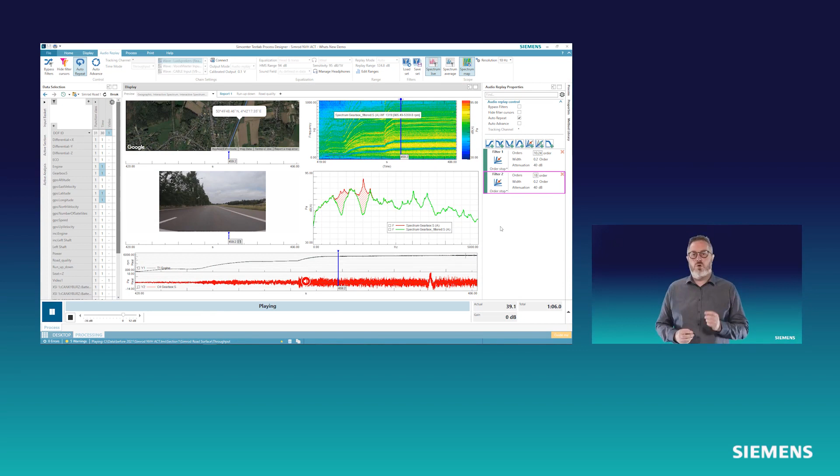My name is Ian McGann, and together with my colleague Simona Ottaiano, we will walk you through the new updates and features we have developed for you in Simcenter Testlab 2021.2. Before we dive into all the news and innovations, I'd like to share with you why we are so motivated and driven to keep developing and advancing Simcenter Testlab.

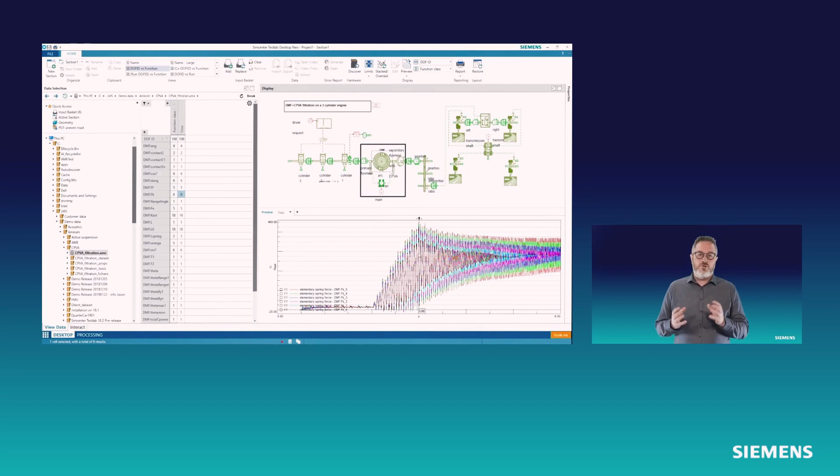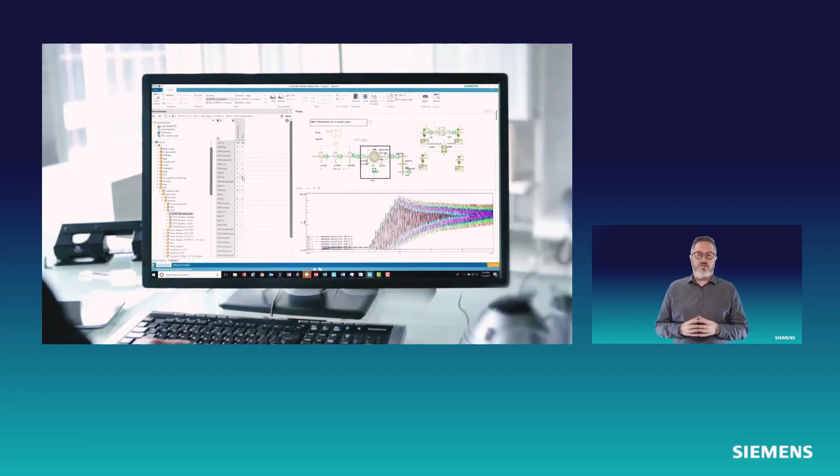This release is a result of hard work of many talented engineers located in multiple countries, united by a passion for making physical testing more efficient and innovative. Due to the current challenges faced across all industries, such as growing product complexity, increased product variants, and customer expectation, the development teams are under pressure to bring products to the market in record time and with cost savings. Very often, they need to work with disconnected tools and processes, including inconsistent processing methods between test and simulation.

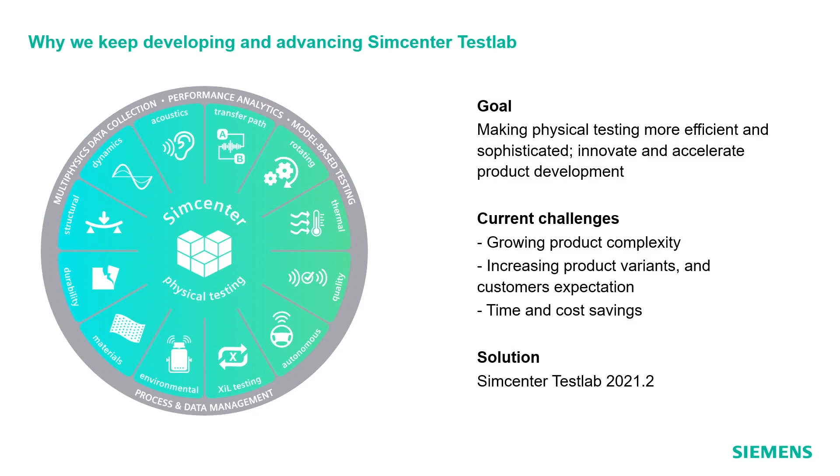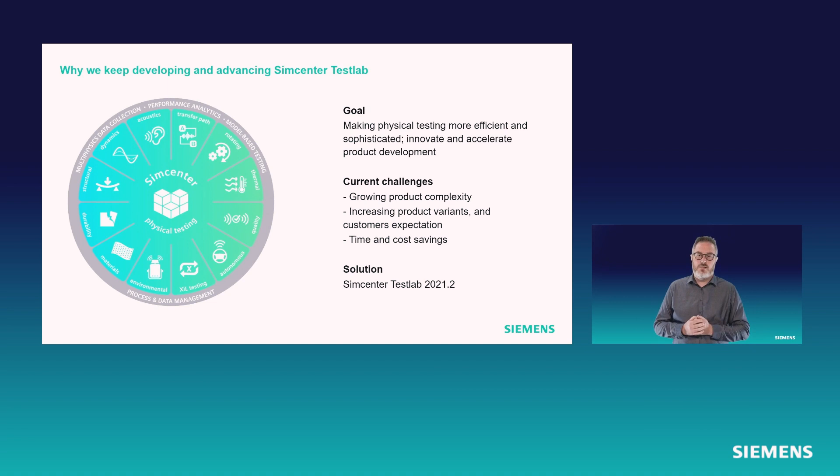Our goal is to empower test and validation teams with the tool set that will help them to overcome these challenges and achieve higher testing efficiency, resulting in time and cost savings. We are on a mission to innovate and accelerate product development by creating a working environment that merges test and simulation together in order to take control of the product attributes much earlier in the development cycle. And the latest Simcenter Testlab 2021.2 release validates this strategy.

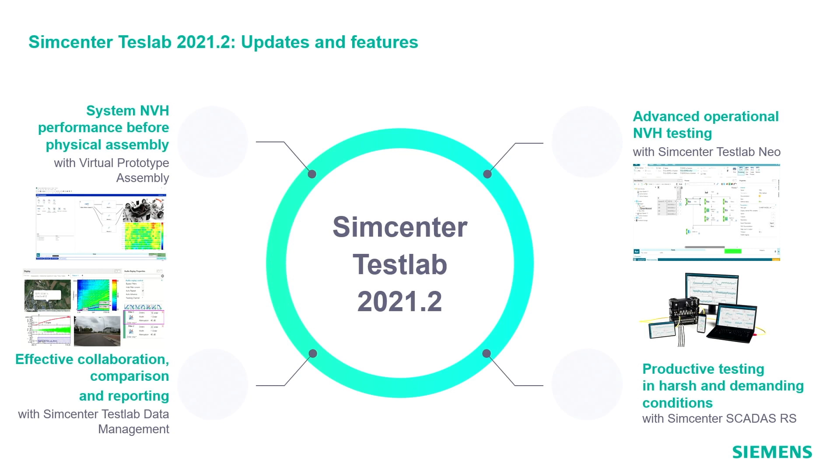In this release, you will experience significant advancements in 4 areas: vehicle NVH prediction with virtual prototype assembly, advanced operational NVH testing, simplified and more effective collaboration, comparison, and reporting, and productive testing in harsh and demanding environments. And now, I'd like to give the word to Simona, who is our expert in virtual prototype assembly. Simona, what is this technology all about?

Thank you, Ian. Hello, I'm Simona Ottaiano and I'm part of the business development team for the automotive industry. And it's my honor to present you the main highlight of the release, Vehicle NVH Prediction with Simcenter Testlab Virtual Prototype Assembly. We acknowledge the current challenges that automotive OEMs are facing. They must handle the increased system complexity, multiplied by an extensive number of product variants. Think of numerous vehicle configurations customers can form. They can select between different bodies, tires, and drives ranging from traditional combustion engine to full electric motor.

And this is another point. Automotive OEMs are expanding their portfolio towards electrified drivelines, which requires new NVH approaches and engineering strategies. And of course, the development teams are under time and budget saving pressures. For this reason, building a prototype of each vehicle variant is not an option anymore. And this is where virtual prototype assembly comes into play. This technology marks another achievement in merging test and simulation, as it combines test and simulation component models.

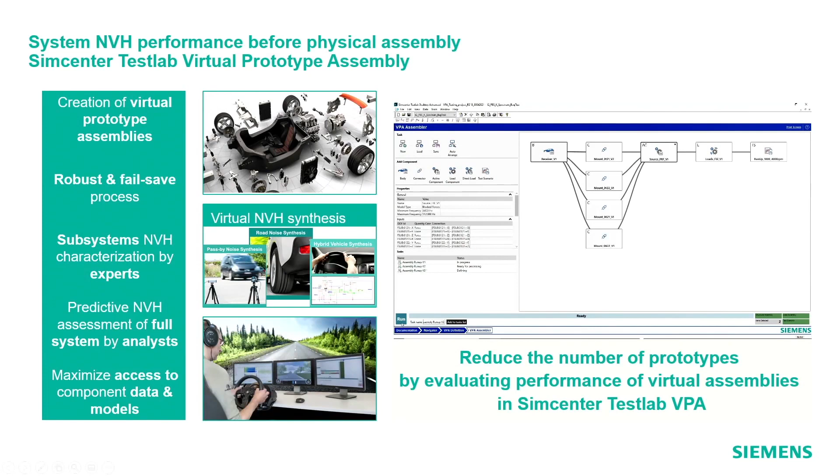It allows engineers to create and assemble vehicles in a virtual environment from separate component models and assess the NVH performance of all those components working together. The component models can come from test data or simulation data. Essentially, it's about front-loading vehicle-level component NVH testing into the development process in order to make changes as early as possible.

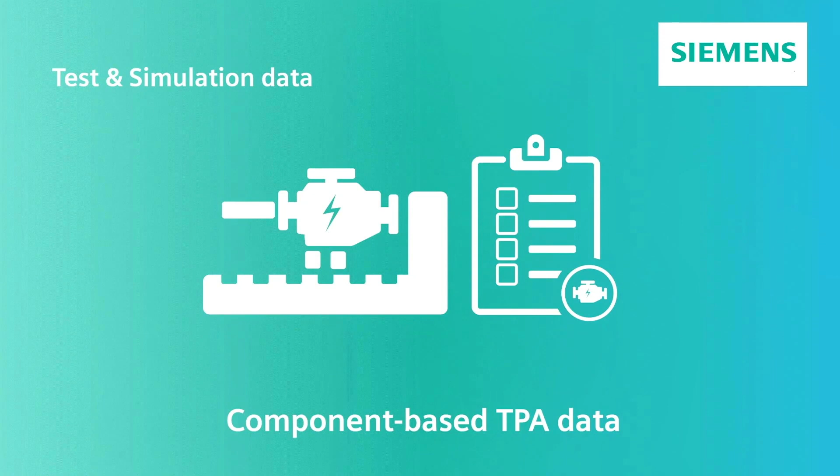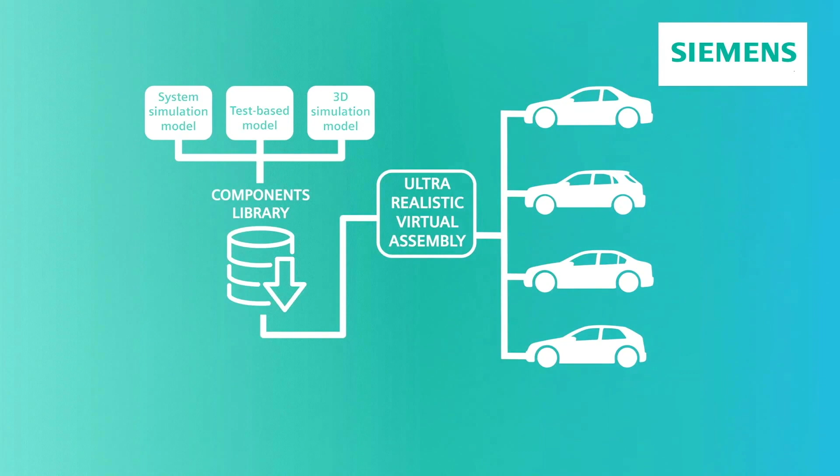The key to this is component-based transfer path analysis, where engineers test each component to characterize the noise and vibration source. With this source component description, you can build up a library and use it in a modular way with other vehicle components. In this way, you can virtually assemble the entire vehicle and predict NVH performance. This approach empowers the team to take control of the NVH in much earlier development stages.

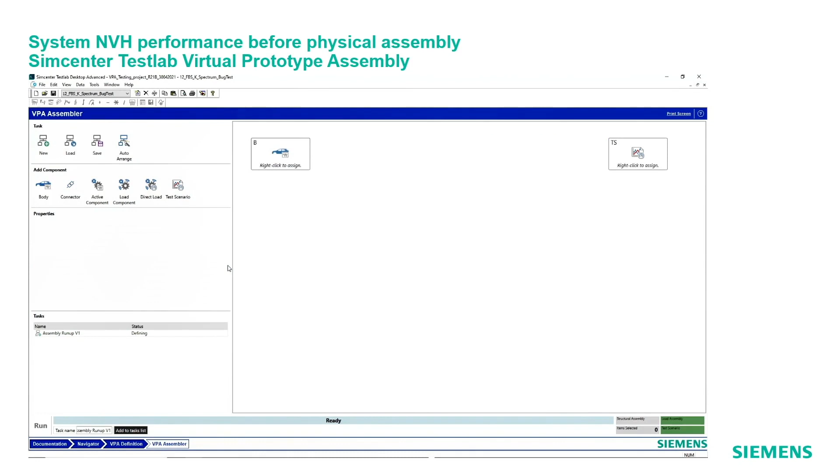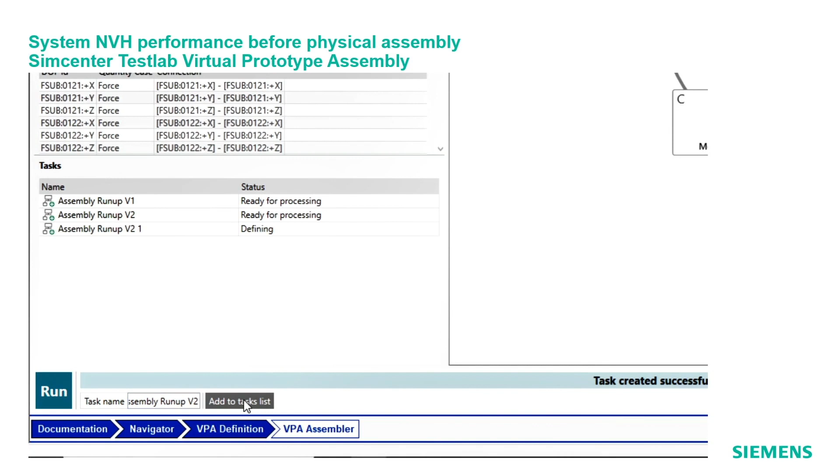The virtual prototype assembly in Simcenter Testlab 2021.2 makes this technology accessible and easy to use for anybody in your team, with robust and fail-safe embedded processes. We hope that you will appreciate the intuitive user interface to build a vehicle assembly and the flexibility to easily exchange the components to evaluate them quickly. Also, this technology accelerates vehicle development by enabling different teams across the world to cooperate and work unitedly on joint projects. Moreover, with this solution, you can build a solid OEM supplier cooperation framework based on objective data and requirements.

The next significant portion of improvements you will find is in Simcenter Testlab Neo software. As you may know, Simcenter Testlab Neo enables you to easily evaluate, analyze, report, and share test and simulation results. With Simcenter Testlab, you can maximize your efficiency and achieve engineering insights even when handling large volumes of data. The increasing number of design variants puts pressure on NVH and sound quality engineers in development and validation teams. They must deliver test results faster and in a more efficient way.

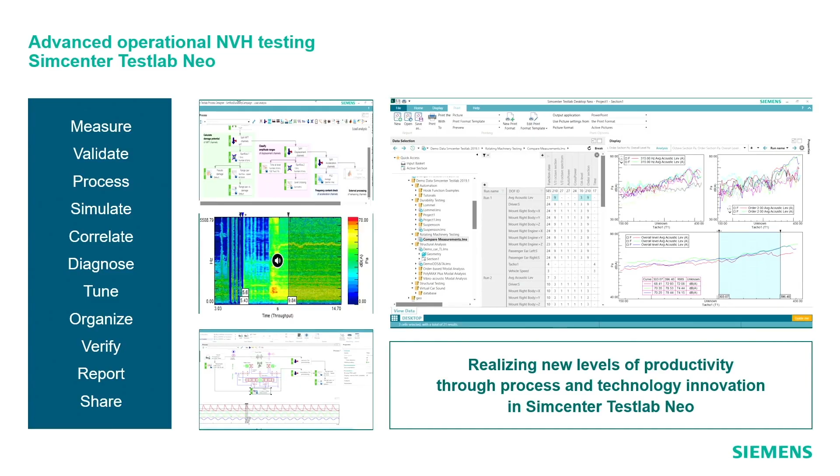Regardless of their level of expertise, engineers need tools that help them achieve better results more quickly while maintaining the same level of quality and confidence in their analysis and methods. Simcenter Testlab includes new advanced audio replay and sound quality analysis extensions. To simplify and accelerate your testing projects, Simcenter Testlab Neo 2021.2 Process Designer provides new filtering and selection options based on vehicle operating conditions. You can filter and select only the data or segments recorded under specific operating conditions.

And that's not all. Now you can even set up selection automation based on the defined operating conditions. And as the next step, you can use it in a processing sequence in Simcenter Testlab Process Designer. Imagine a situation. You, as an NVH engineer, record some data for your project, and you need just specific segments. For example, when your product was operating under a particular condition, such as a specific speed, RPM, and so on. Simcenter Testlab Neo Process Designer supports automated validation of test conditions, as well as free drive scenarios for controlled testing.

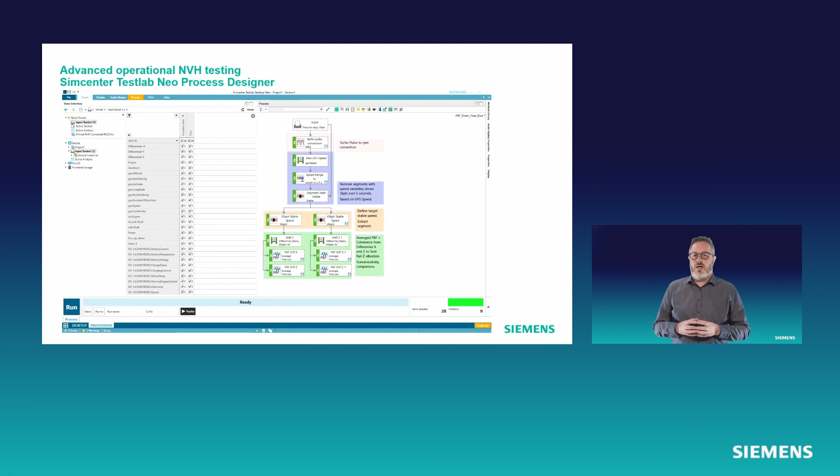As a second step, you can validate the data in a quick and iterative way, tracking selected parameters. The software then evaluates the effect of order pass and stop filters on any replayable signal. And you can quantify the psychoacoustic relevance using, for example, the new hearing model tonality maps.

Once you validate and assess the recorded data, Simcenter Testlab Process Designer provides you with automated conditional processing using smart segment selection to break up long measurements based on annotation channels or measured values. Then you can separate identified segments.

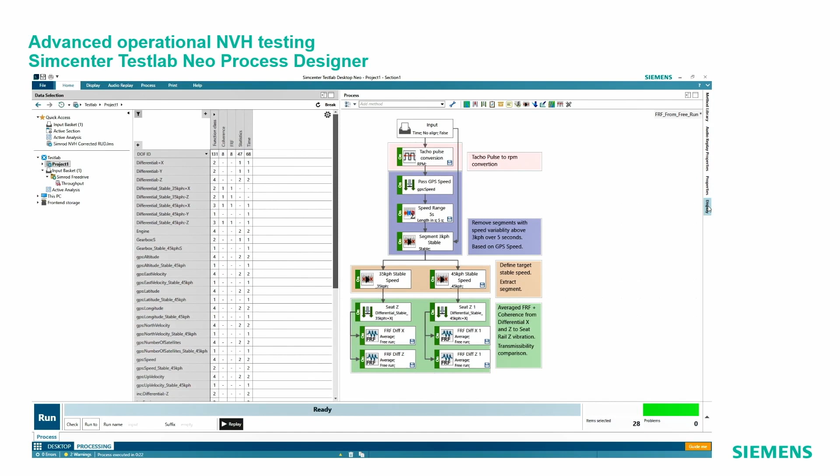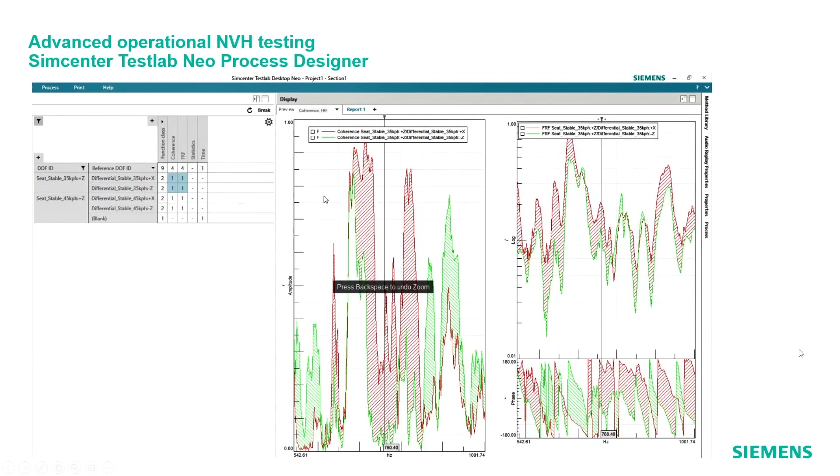The checks method validates the adherence to the requested target operating condition. For example, the smart segment selection will thus limit the calculation of coherence and frequency response functions to data segments with sufficient stable speed conditions.

Another feature I'd like to mention is a simplified buildup of your models. With this release, you can assemble the test geometry, importing and merging existing Testlab geometries, finite element files, or STL files. You can manage multiple geometries in one project.

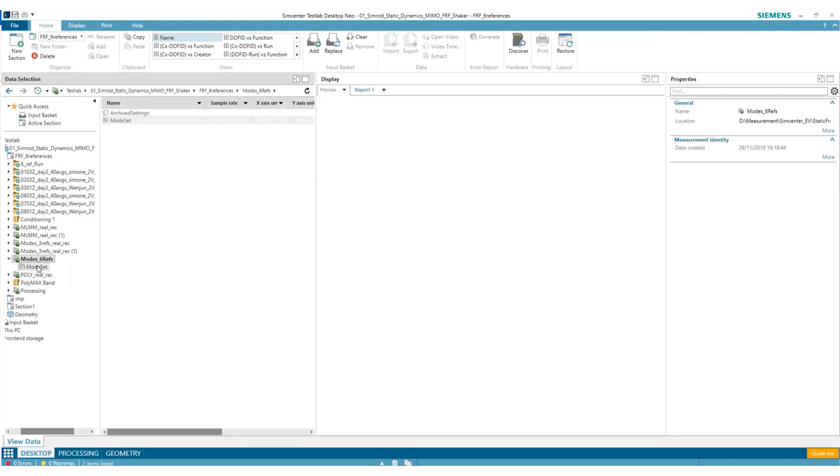Simcenter Testlab 2021.2 offers flexibility in selecting measurement nodes from existing topology representations and transferring the information of such nodes to the active geometry used in the test preparation. As a result, you can visualize the measurements on any of the source geometries to enhance the interpretation of the results at a component or assembly level.

There are also important updates in Simcenter Testlab Desktop and Data Management. As you probably know, Simcenter Testlab Data Management provides a fast and easy comparison of measurements, analysis, and simulation results of multiple test items across test sites. It's a really powerful tool to make the best possible use of Simcenter Testlab data organization, visualization, and reporting capabilities.

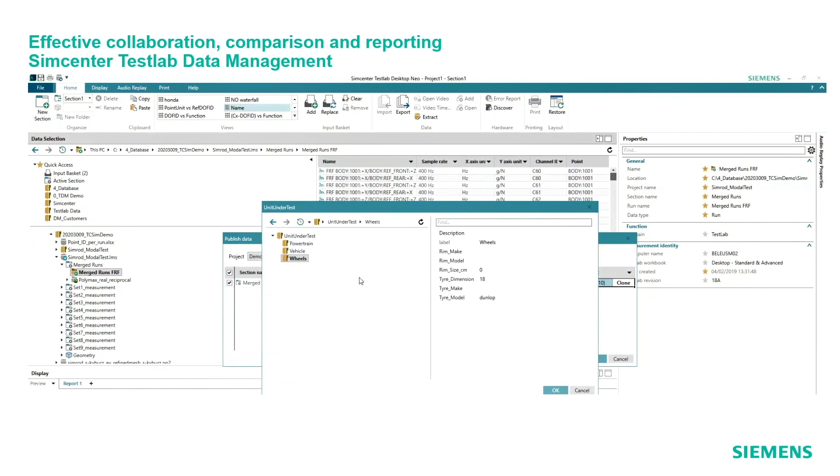We are happy to announce that with this release, you can scale up the data backend using an ASAM-ODS database in Simcenter Testlab Data Management. In such a configuration, you can publish data together with context information according to a customizable data model. What's more, you can make this data accessible in a structured way to peer users, colleagues across departments, and even suppliers and customers. All stakeholders can now search for the data based on engineering properties and context information in an ASAM-ODS standardized way.

For publication and the searching of data, Simcenter Testlab Data Management interacts with the Peak ODS server software from our partner Peak Solution, supporting the latest ASAM standard and databases such as Oracle and SQL Server. The configuration is robust against network interruption when transferring data.

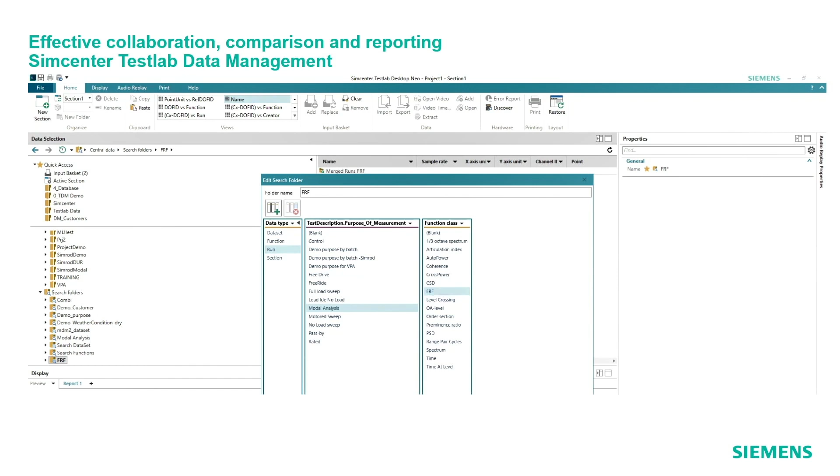Engineering can thus use Simcenter Testlab for both local LMS projects and central data, such as ASAM-ODS standard compliant datasets. And they can evaluate, analyze, report, and share test and simulation results with their team, maximizing efficiency and providing engineering insight, even with large volumes of data.

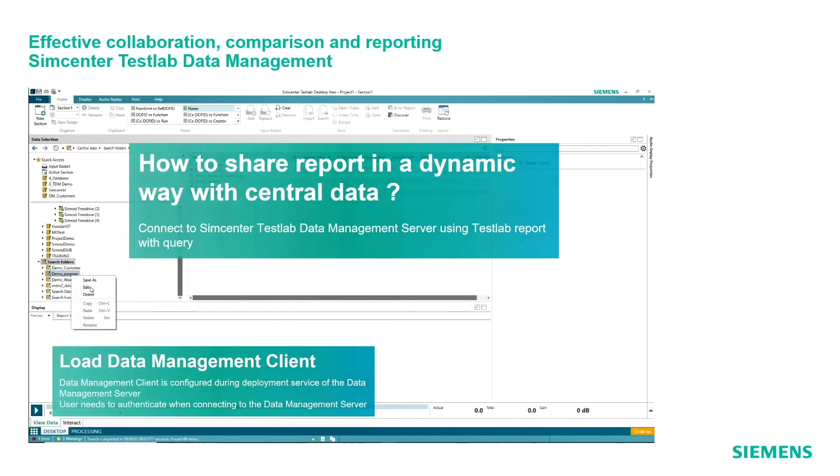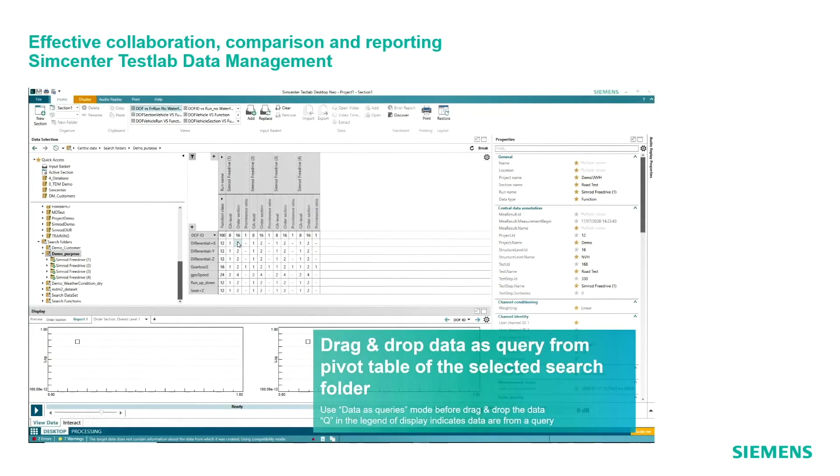The nice thing about the link to the ASAM-ODS is that you can also find the Simcenter Testlab reports, so they're also stored centrally. Another nice feature is that it dynamically extends this report to compare previous available results with the newly published data in the central ASAM-ODS database.

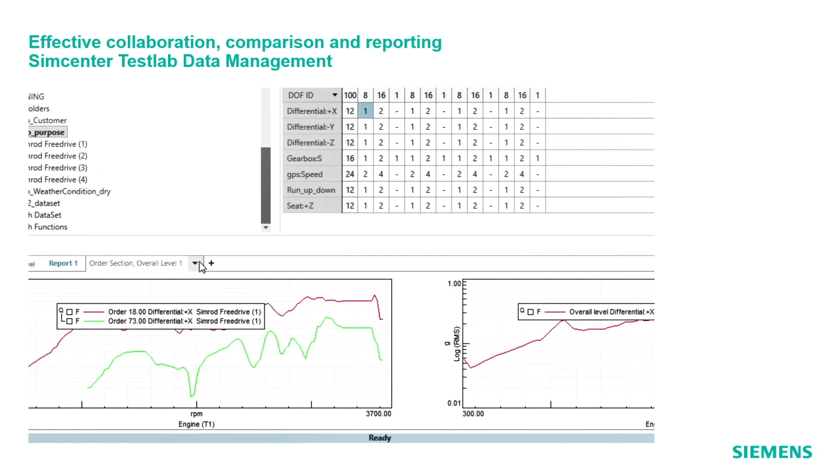Maybe a side note, a Simcenter Testlab report is a smart document with embedded data queries and a pre-formatted multi-page graphical layout. This means that when your colleague opens such a document, they will see all displays automatically filled with the correct curves based on the embedded queries. They can easily add new data for comparison or correlation. These new data links can serve to complete the original report or create a new one for further distribution.

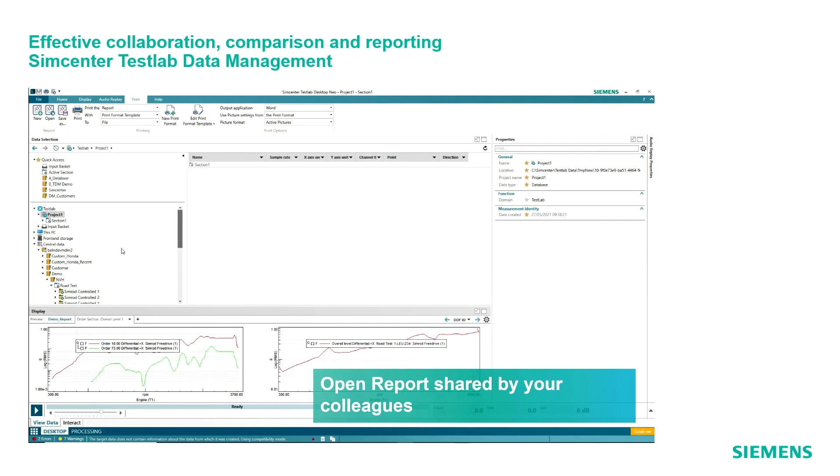From my experience, I need to say these interactive reports are very powerful and essential to have a good team conversation. They bring a lot of clarity in difficult discussions. Ian, will you share with us the last release updates?

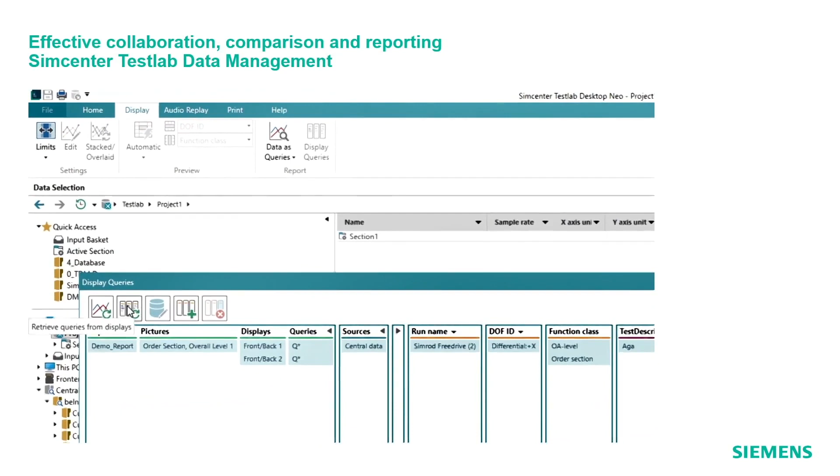Sure. Thank you, Simona. Maybe you know about our Simcenter SCADAS RS. It is the latest member of our Simcenter SCADAS data acquisition hardware we introduced earlier this year. It is a dedicated solution designed for test engineers facing the challenge of reliable testing under demanding conditions.

Developing off-highway vehicles often results in testing during extreme conditions, such as high and low temperatures, moisture, mud, dust, and vibration levels. With pressure on deadlines, operational data collection campaigns need to be optimized from start to end, despite the harsh environments. Simcenter Testlab 2021.2 is the first release that supports the brand new Simcenter SCADAS RS rugged data acquisition system, optimized for productive multi-physics data collection in harsh environments in the off-highway market.

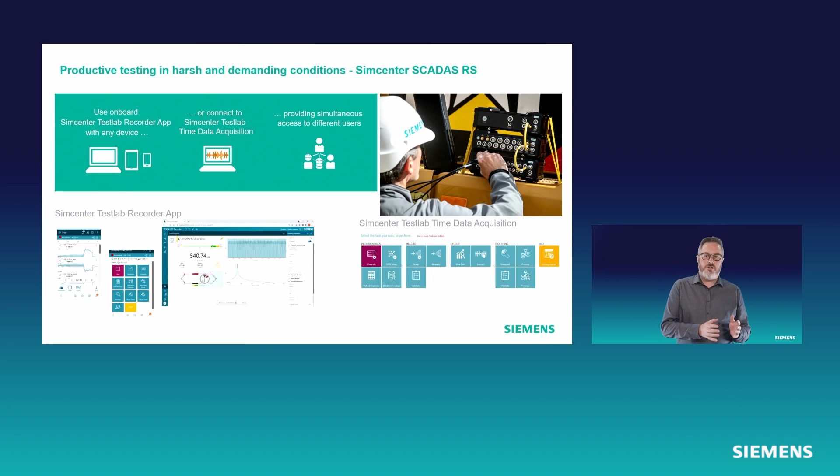Simcenter Testlab provides you with the software to confidently execute demanding test campaigns, preparing instrumentation, setting measurement parameters, and monitoring data collection on any device. There are two software environments you can work with. You can start testing projects using Simcenter Testlab 2021.2 to do your test configuration, your sensor selection, your channel list, the test settings, and to proceed with the data collection with the time data workbook.

At the same time, you can access Simcenter SCADAS RS with a web app. This app allows you to change the settings on the channels and monitor the data operating conditions from any device.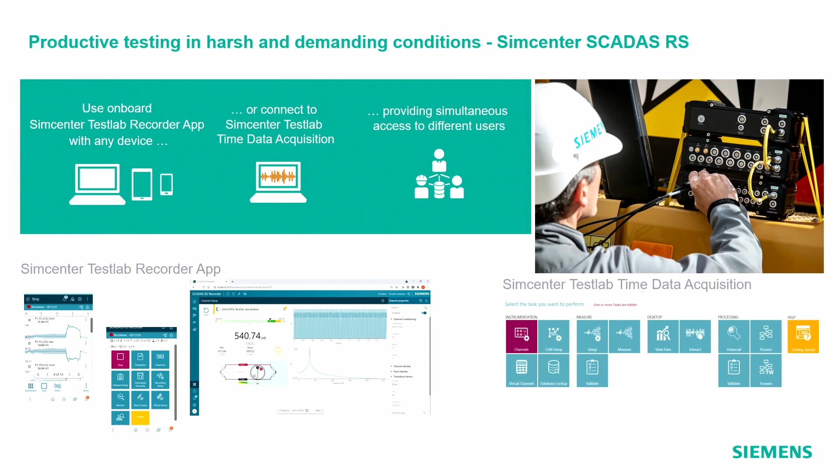With this, we'd like to thank you for joining us on this quick tour of the new updates and features that we have developed for you in Simcenter Testlab 2021.2. We hope that this new release will empower you to be successful in your testing projects and effectively overcome many of the present-day challenges.